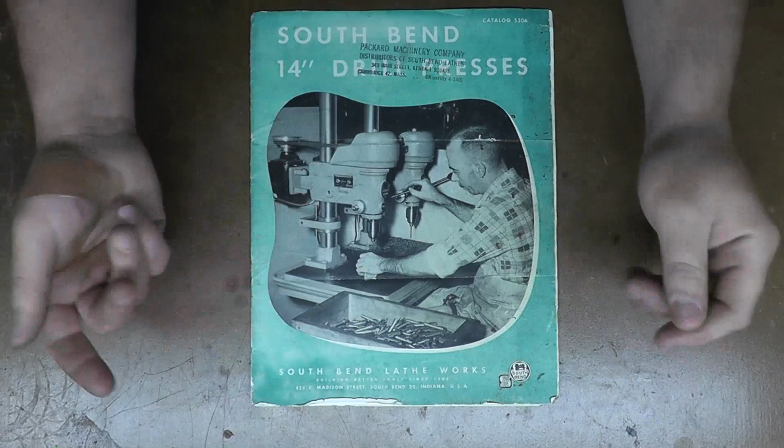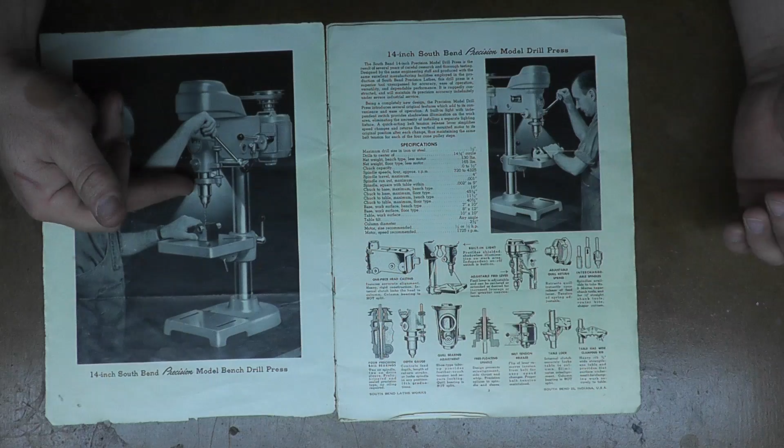Alright, so this is just an old catalog that was with my drill when I bought it. Apparently there were two types of drills besides the bench mount and floor mount: the precision drill press, which is what I have, and an economy drill press, which I've never seen before. It basically just didn't have all the bells and whistles. You can see this catalog's kind of falling apart.

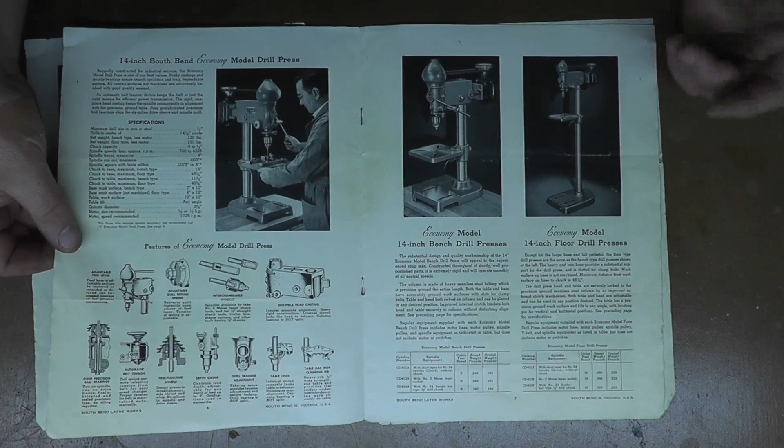This is the economy one. It didn't have a few of the options, didn't have the light, didn't have the quick release for the motor tension, and had a smaller casting up front. I've never seen one of these, only the ones like I have, but we're kind of concerning ourselves with a few of the options here.

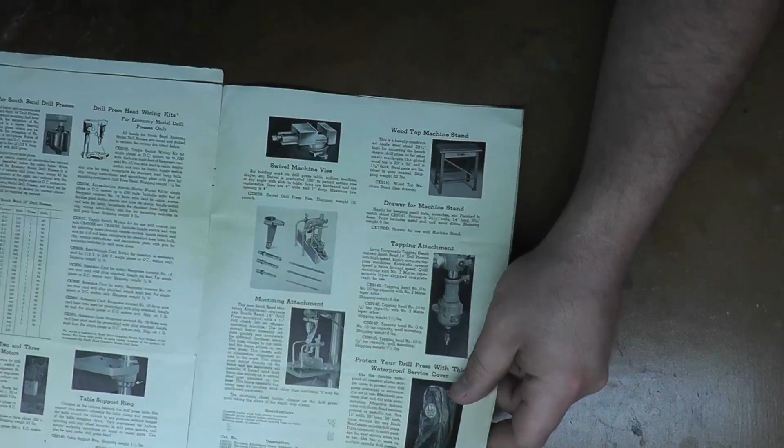And these are just mortising attachments, and this is the style of base that they gave that you could buy with it as a wooden table.

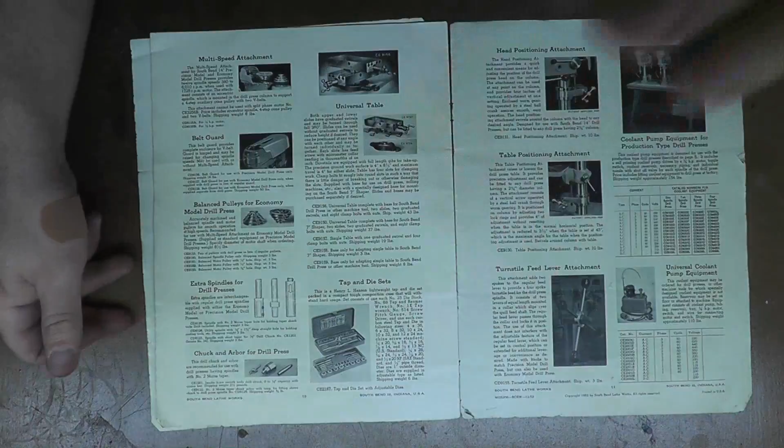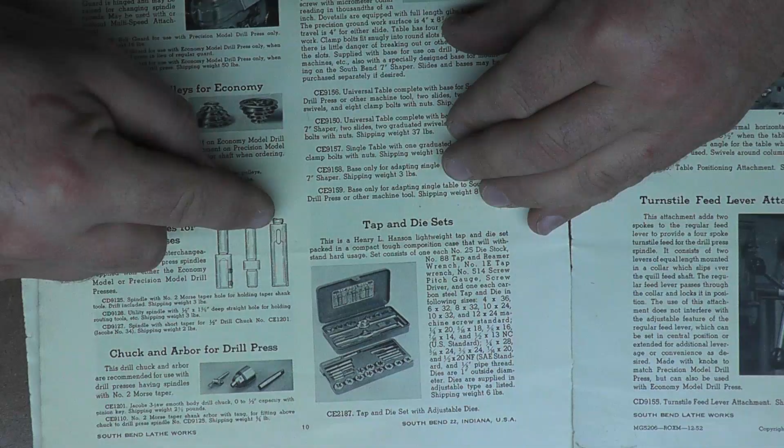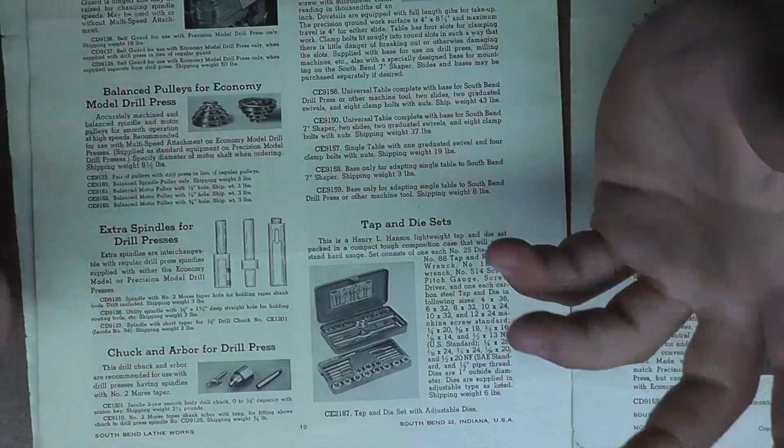Now the drill presses did come with different spindles in them, and they are interchangeable. There's a straight shank, which I've never seen before. There's the Jacobs tapered shank, which is what I have on the drill press. And there's the number 2 Morse taper, which I've also seen. The only problem with the number 2 Morse taper is that it extends below the casting, so especially if you have a bench mount, you lose a decent amount of travel with it.

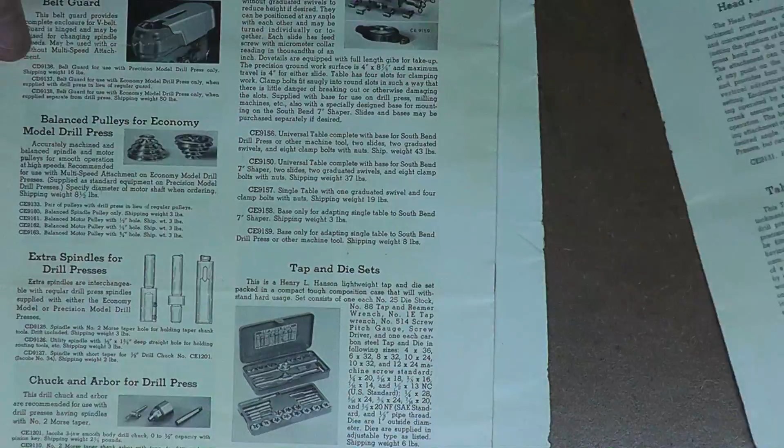And here's the multi-speed attachment up here that I have on mine. And what we're kind of concerned about here is this right here - and this is what we're going to be building.

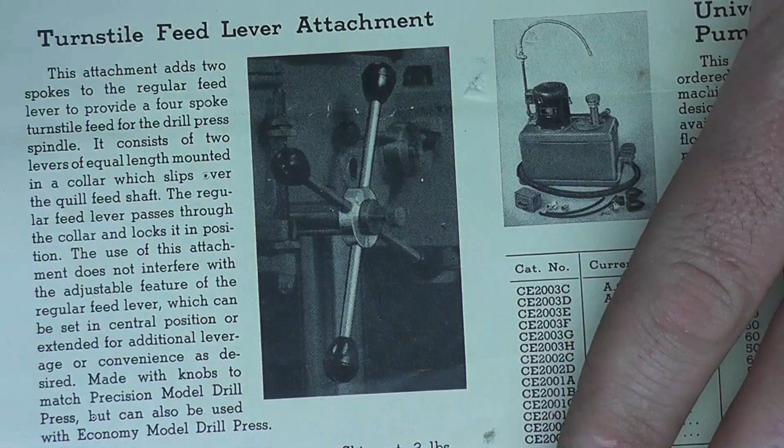So basically it still uses the original handle that's there and the original set screw for the handle, which mine is missing, so we do have to make that up. I'm pretty sure that's a 3/8 thread on there. We'll probably make that little knob out of brass, or you can make it out of steel - just be sure to put a brass shoe in the hole so you don't mark up this rod.

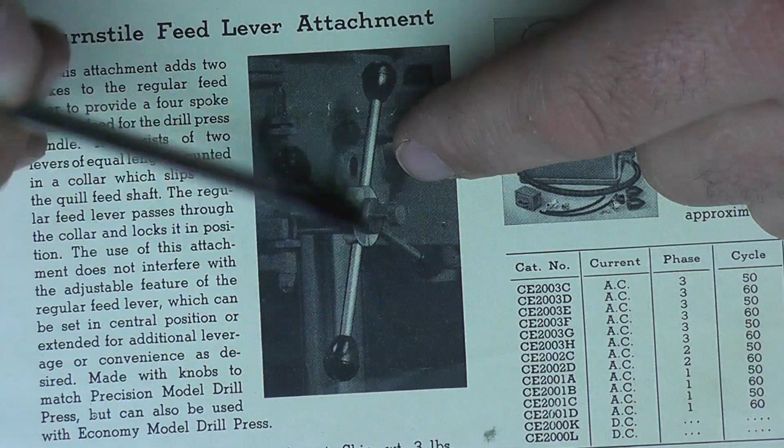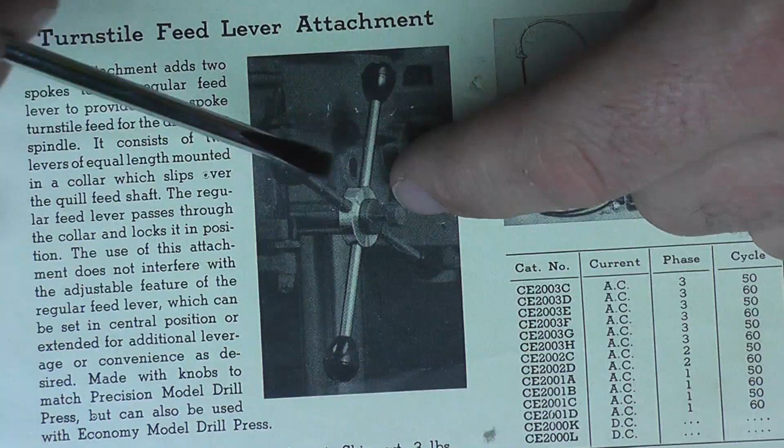So basically it consists of a central hub with two fixed handles on it. So we're going to make a rod. I'm going to drill and thread this here and here, and then have a through hole right down the middle where we can slide the original handle through.

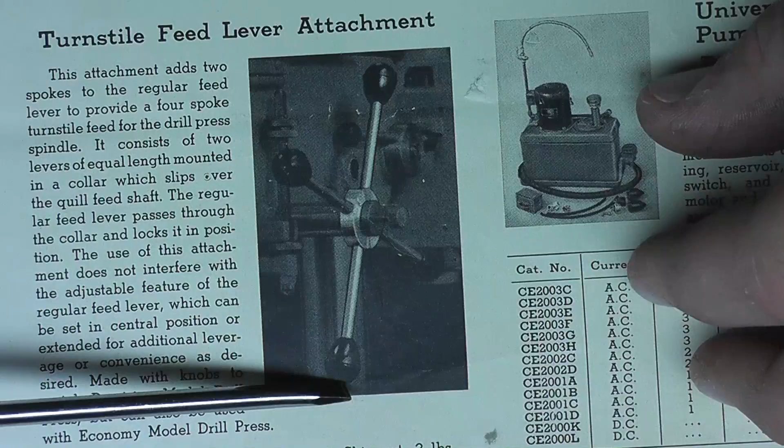Now I don't have any black Delrin or anything. These handle knobs are plastic, so I'll probably just end up making them out of aluminum or something. Plus they're kind of acorn shaped - I'll show you when we get to that part. The original handles are acorn shaped, so we might just make round ones here.

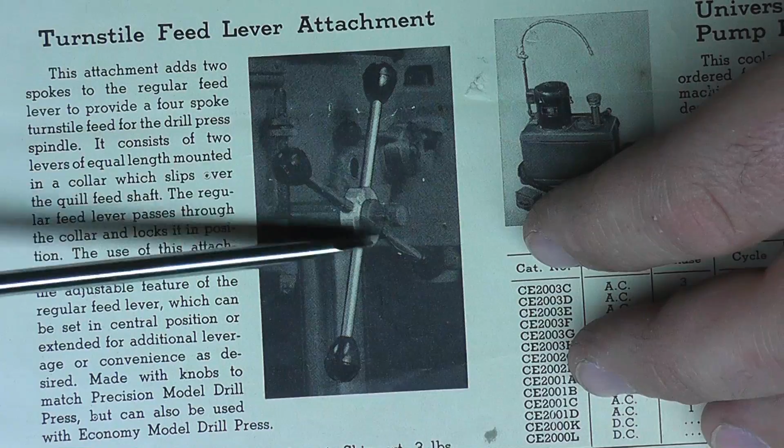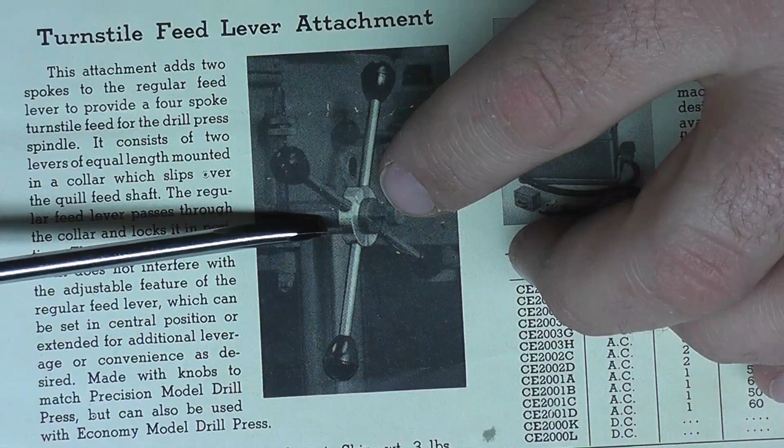We'll see. So we've got to make this central collar, which just slips over the actual quill here, and I'm going to make it 3/4 of an inch wide by the diameter of that quill extension, which is a little over 1.25 inches. So I'm going to have to bore that out. I'm going to use 2-inch 12L14 steel.

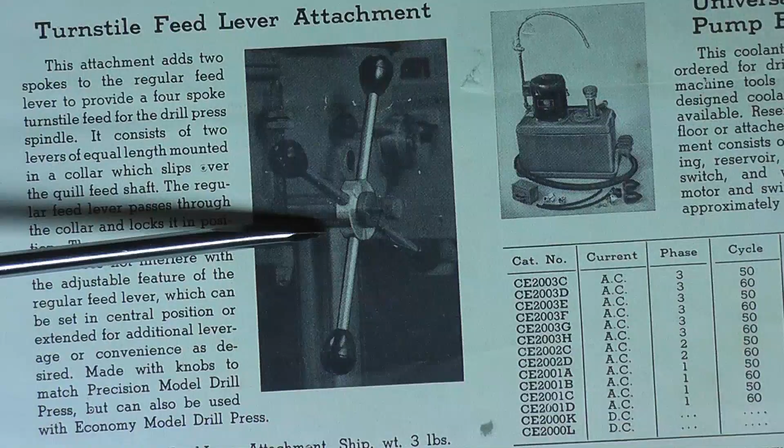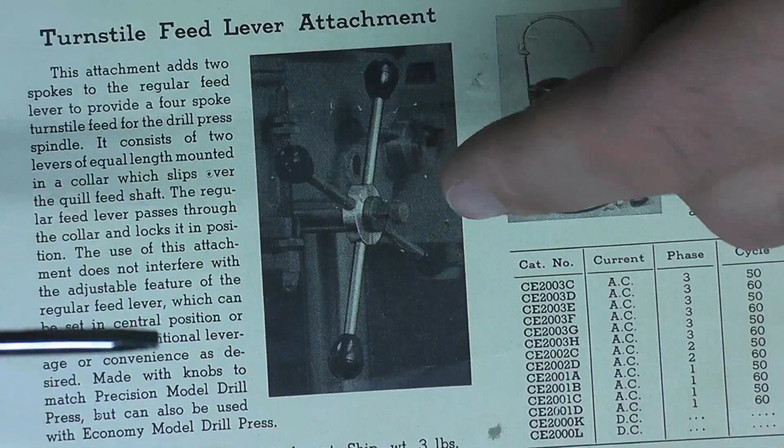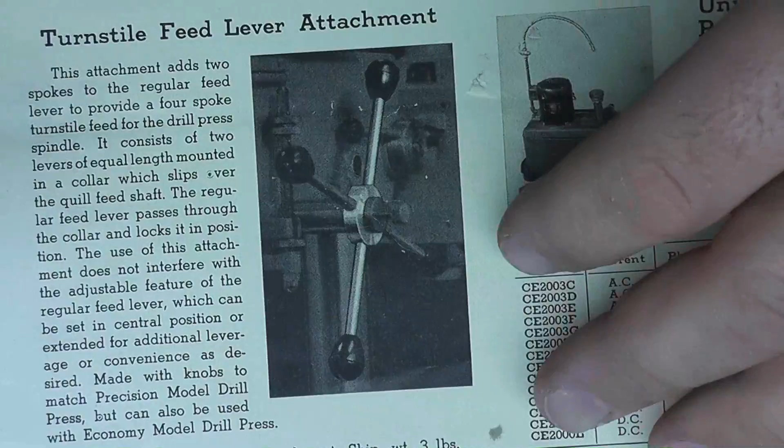And so we're going to do that - these rods here, the rod that's there is 7/16. Now I don't have any 7/16 stock around here. The closest size I have is 1/2 inch, so I'm not going to worry about knocking it down by a 32nd per side - it's going to be a little bit bigger. I'm just going to use the 1/2 inch on it and call it a day.

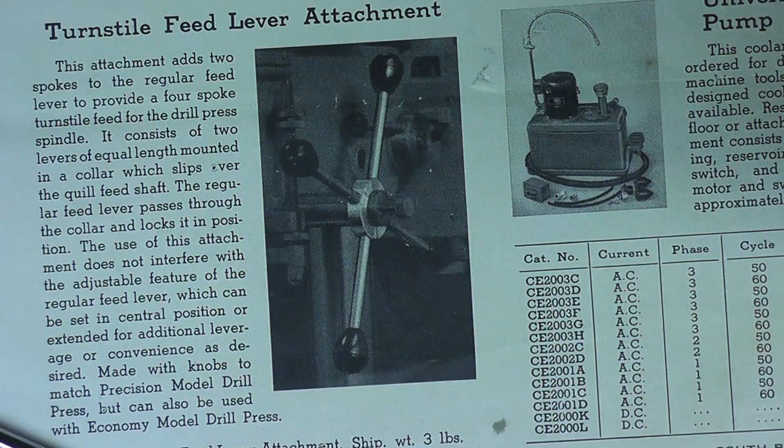If I had 7/16 steel, I definitely would use it, but I don't want to go out and order some, so we're just going to use the 1/2 inch I have, which I have plenty of. That's kind of the way we're going to make it.

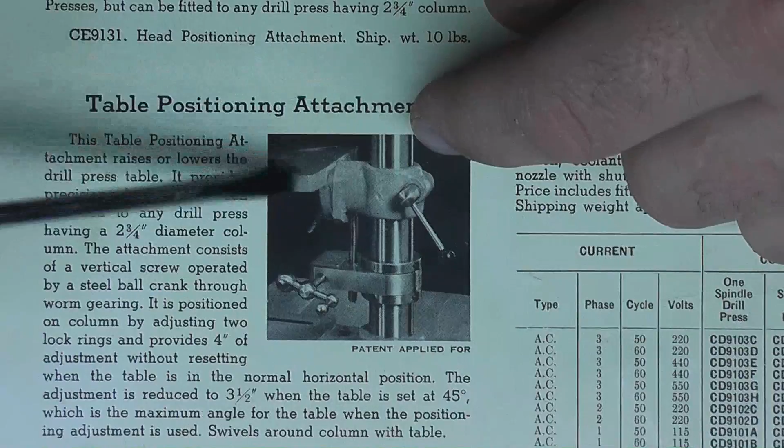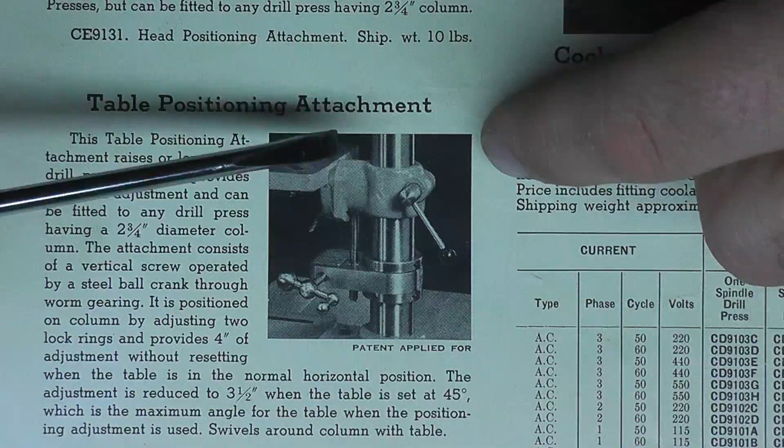Another cool attachment here is for a problem with these drill presses: unlike a lot of the newer ones, it doesn't have a hand wheel to raise and lower the table. A lot of drill presses have a hand wheel on the side with a rack and pinion to move the table up and down. The South Bends didn't have that. It's just a straight column, so you have to wiggle and shimmy it up and down.

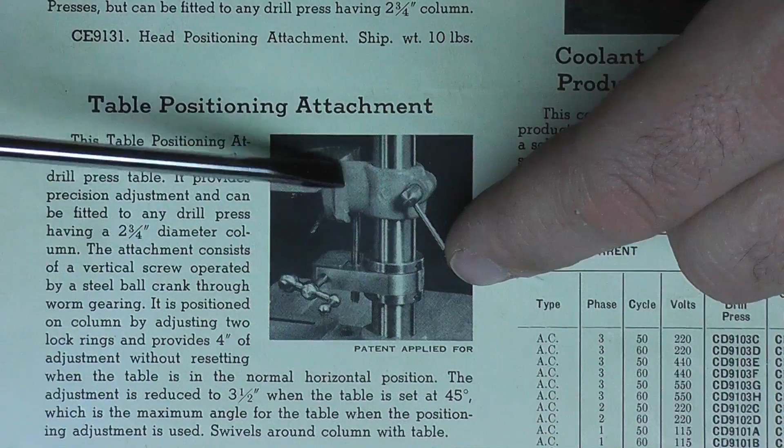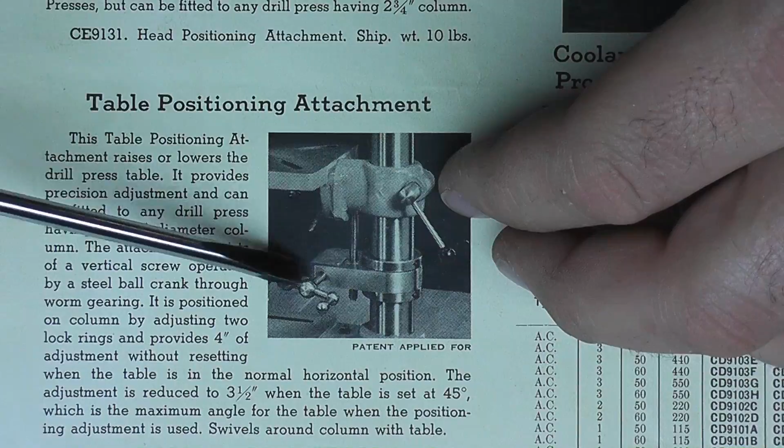But what they did make was this little attachment, which has a threaded rod that attaches to the bottom of the table, going to a clamp that clamps around the pole, attached to a hand wheel with a worm gear. This gives you 4 inches of travel, so you loosen up the table, crank the hand wheel, and you have 4 inches of movement up and down.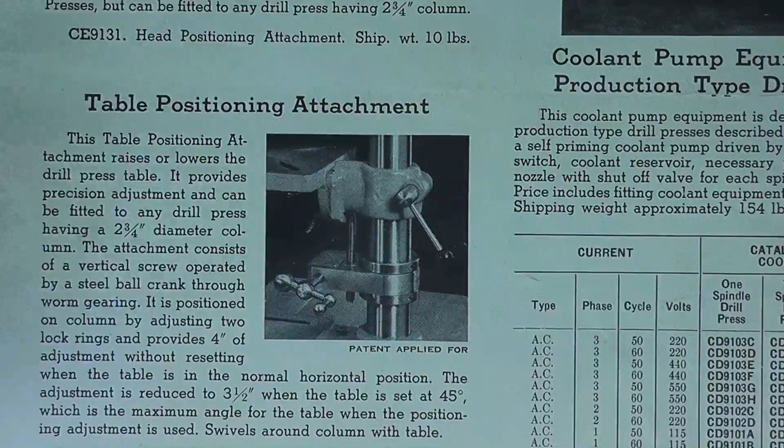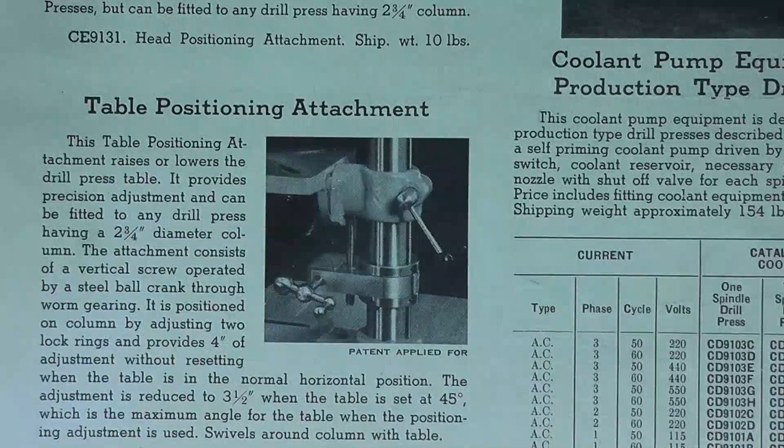And if you want to go more than that, you just loosen these 2 collars, slide it up a little bit, and you have another 4 inches of travel. That's a neat little attachment, and it's definitely something somebody can make in their home shop. Maybe eventually that will be a project. We shall see. So let's go set up on the lathe, and we'll get to making this collar here.

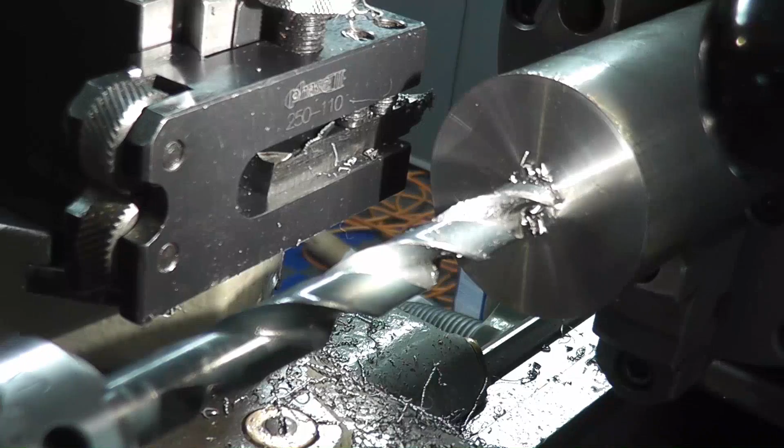Okay, so I already have my part faced and center drilled. Now we want this inside diameter to be at least 1 inch 285 thousandths. So I'm going to drill it as wide as I can, then bore out the rest. I'm going to go 1/2 inch and then...

11/16, and the largest drill bit I have or can find is a knockoff 15/16 Silver and Deming bit. We'll see how good these knockoff bits drill. This is a good drill bit, that'll drill fine, but the other two, not so sure about. I want the collar to be 3/4 of an inch long, so I'm going to drill in 1 inch. That way, when we part off, we know we have that bore all the way through. So let's get to that.

I just wanted to back up real quick because even though I do have a very nice Albrecht chuck, you kind of don't want to use these with reduced shank drills. You can and probably get away with it, but you do have a chance of over-tightening these chucks with the reduced shank. Albrecht actually says do not use reduced shank drill bits in their chucks.

So if I just have a regular Jacobs chuck—now this isn't one of the super chucks, this is just a regular, decent USA-made Jacobs chuck. The super chucks have ball bearings in them and clamp really tight. These ones, not as much.

But if you're drilling really big holes or something that's going to have a lot of torque on there, what you do is tighten all 3 spots on the chuck. There are 3 holes to put your key in. Tighten all of them. That makes sure you have a decent grip on the drill bit, and you'll have a lot less chance of it spinning in that chuck.

Like I said, this is a decent chuck, nothing against these, just the super chucks are much nicer and, as a consequence, much more expensive. Plus this is a knockoff Silver and Deming bit, so we'll see how this does. I mean, this is relatively soft steel, so it shouldn't be too bad, but we shall see.

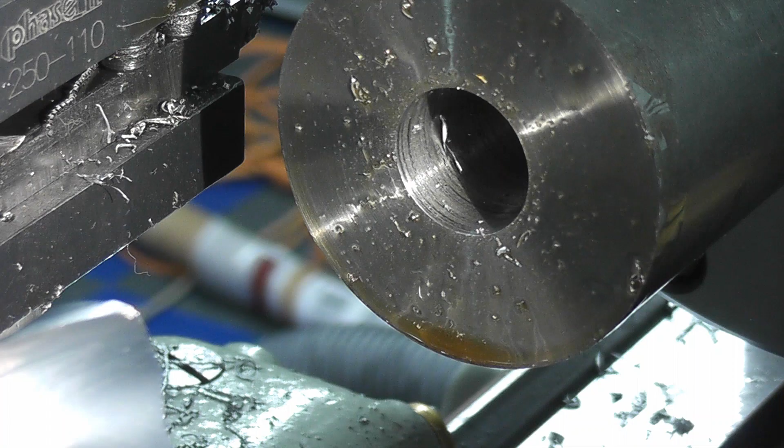We'll see how big it does over here. Distinct feeling that this one's not going to fare as well, but could be wrong. Again, I'm tightening all three spots on that chuck. And for depth, I am using the numbers stamped on the quill. Alright, let's see how this thing does.

Well, that wasn't too bad for knockoff $2 silver and Deming. Not even the silver and Deming bit - I won't even give it that much credit.

Alright, so now let me just set up to bore this. Okay, so we're set up to bore this now. I gotta bring it up to 1 inch, 285 thousandths. We're at roughly 930 thousandths right now.

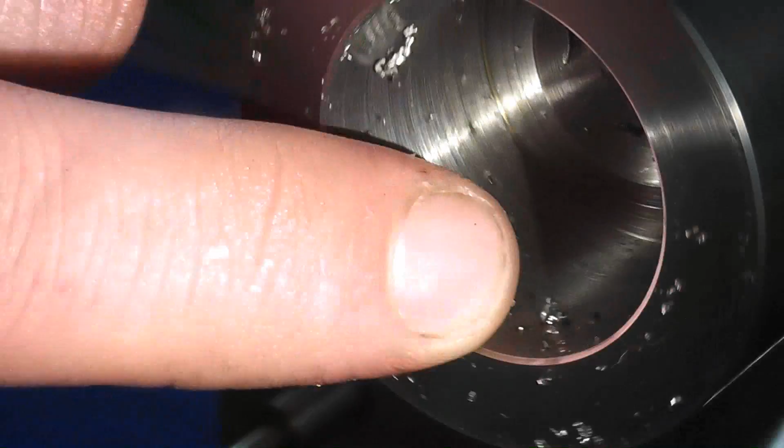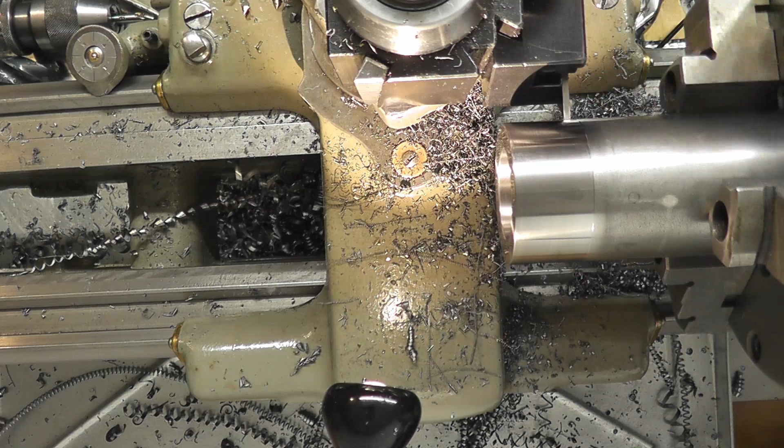Alrighty, so let's pull it back up and we'll get ready to part this thing off. I just did one slight truing cut on the outside so everything's concentric, and I just polished everything. Now since I'm going with 1/2 inch instead of 7/16 on the rods, I'm parting it off a little bit longer, so we have a 900 thousandths part here. Just a little laid down here, and we'll get to parting this bad boy off.

Now whenever you part off or face off on a smaller lathe, be sure to lock your carriage down.

This is leaded stock, so I can go a little bit faster than I would normally on the feed in. But with the leaded stock and stuff, you want to keep constant pressure on that tool.

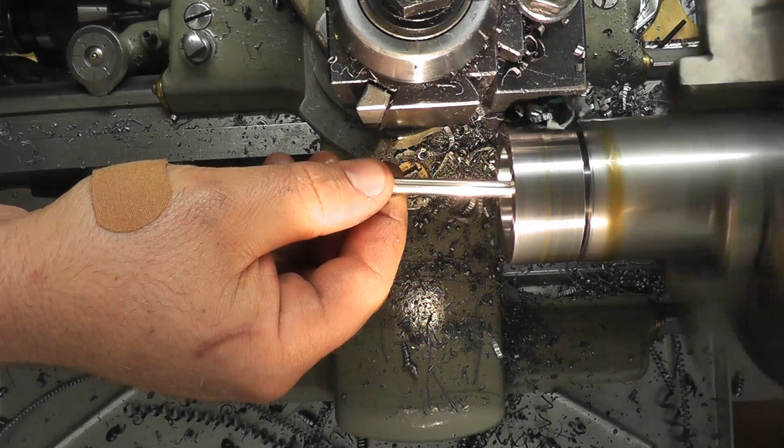This side here, I'll just re-chuck it and just give it a quick face.

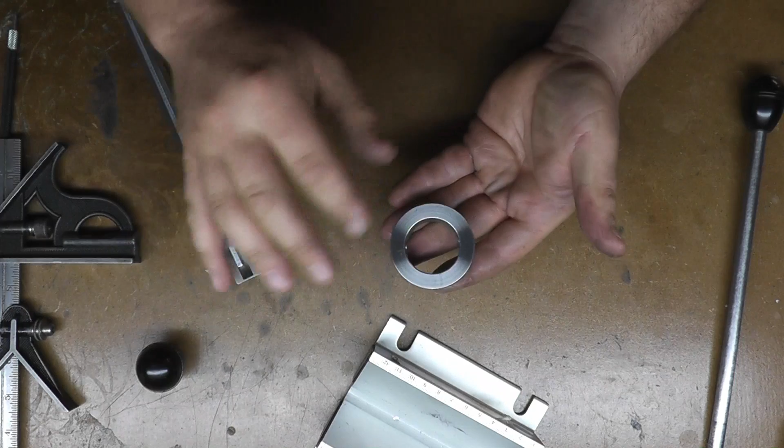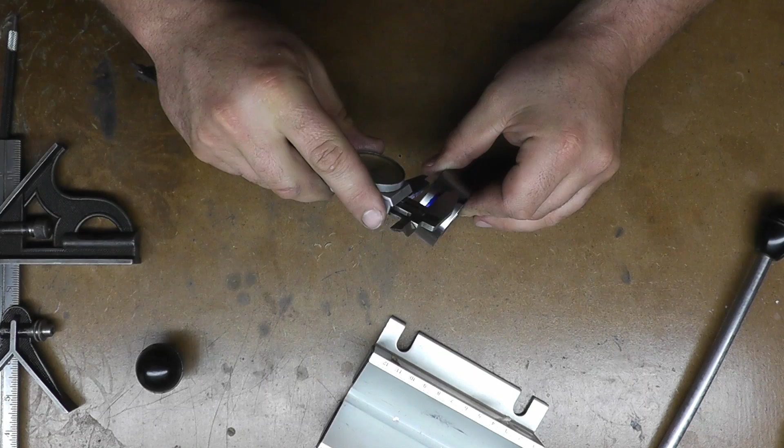Okay, so we have everything all parted off, we're all polished up. I already drilled the clearance hole for the original rod, which is already in there. Now the way I did that is I just put some bluing on there. I have my caliper set to half the distance there - just put one little scribe mark, switch it to the other side, do the same thing, that splits the difference.

And then I put a center punch mark in there, and I went over on the drill press and using my drill press vise, I lined it up and drilled straight through, making sure that we were in the middle, which we were. And because it fits really good, my drill press vise has a nice little slot in the bottom that you can kind of sit this in and wiggle it around until you get it perfectly vertical. And that's the way we went.

We got it pretty much dead nuts on center. I double checked it through the quill and we're fine on that. Now these two ends I have to drill and tap.

Now even though we're using 1/2 inch rod, I'm going to tap these 3/8-16. That's what the ends of this rod are, but there's a reason why I'm doing that. I could probably do 7/16, but I'm going to do 3/8 in case I ever want to get some 7/16 and remake the rods.

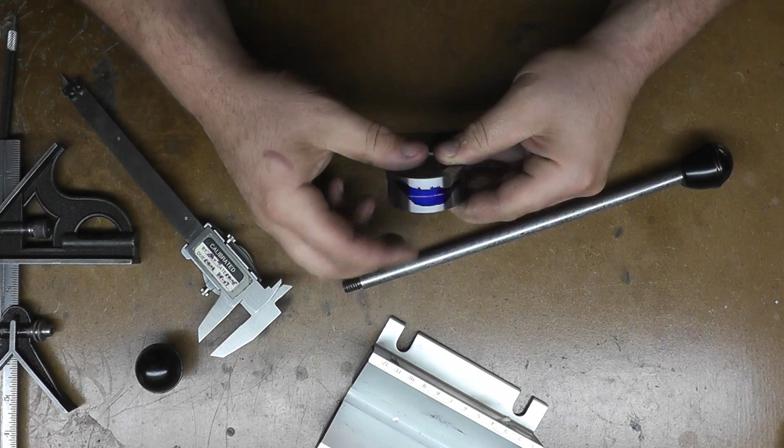But basically what I want to do is drill and tap that, and make the thread smaller than the bar, because I have to take an end mill and basically countersink it so that it fits - when you look at it on the side, it fits flat into this radius here. If not, it's going to stick above. So we have to basically mill a little flat on there.

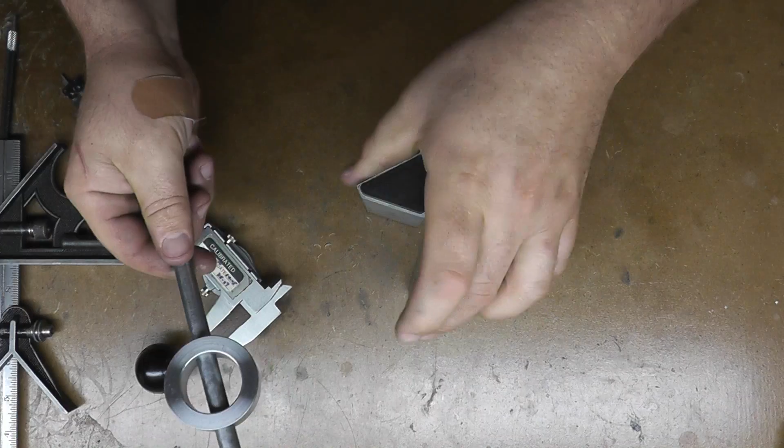So that's why I want to have a smaller thread than the actual rod that we're going to be using. And this actually works out perfect, because this bar through here and my little crappy V-block here end up being perfect. This is actually the perfect height for this V-block.

So I can put this in a vise and I can clamp this bar here, here and here. I can clamp this to the table and drill straight through, and we'll have a nice true straight hole. So I'm going to go set up and do that, and we're going to drill and tap these holes. I'll probably just show one because the other one's just going to be the opposite.

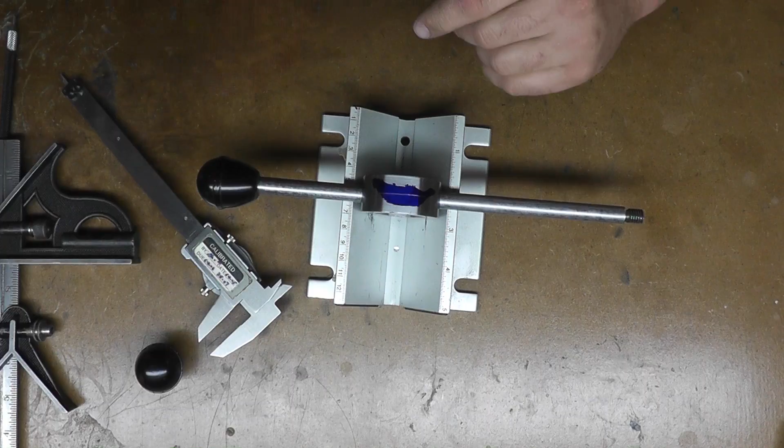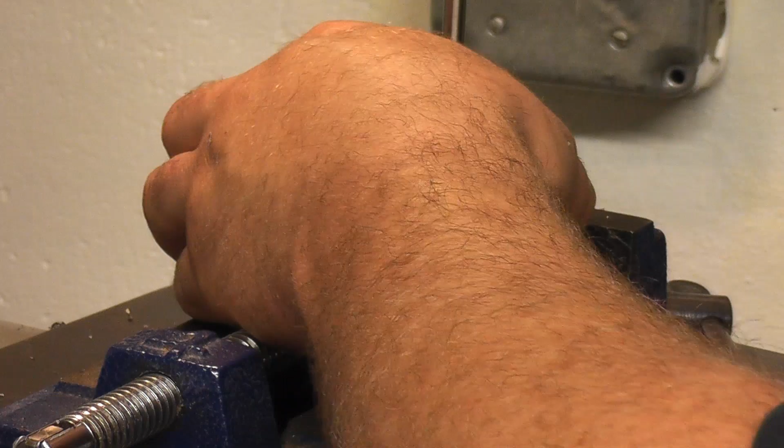Alright, I already center drilled this using the V-block, so what we're going to do is put it in my vise to be able to hold it. Kind of just line this up here, give it a quick little snug, and we're going to take our handle, put our handle through, and now we can pretty much get this handle level and know that we're on center. So a little bullet level. Okay, good right there.

Drilling. Oil, and I have a temporary handle in here. Through.

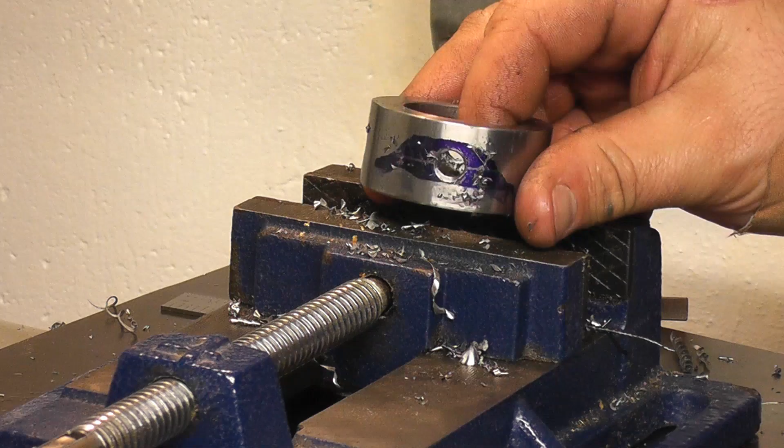And there we go. Drilled there, drilled there. Now if you put any marks, I did put a little mark right here from tightening the vise way too tight. If you want, you can face that off. I'm not really worried about that. I'll put that on the inside.

So now what I want to do is I want to make the pin to hold the quill in place, so that way there we can get how long that we need to make the two handles that screw into here.

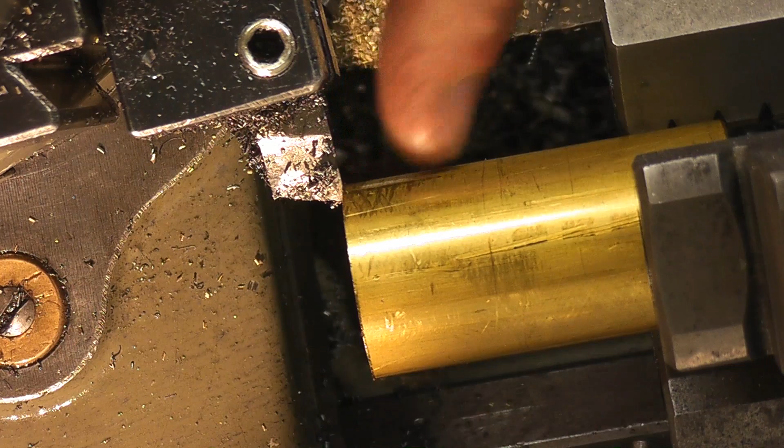Okay, so I need to, this is a piece of 1-inch brass, I need to turn down a length of 1/2 inch to 3/8 diameter so I can thread it. I have my carriage dial indicator set up here, so we'll turn this down.

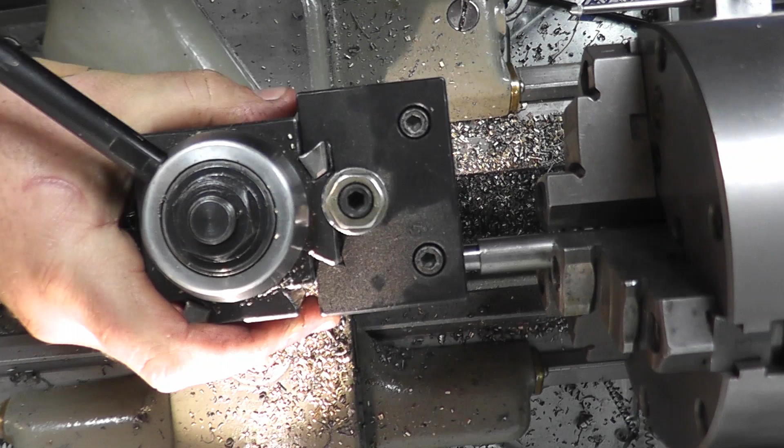This is just a boring bar holder, but it's really big, so I like using it with the dies. And the only reason why we're using the die, I'm not single pointing this, is because it's just such a short thread here. It's nothing too critical, so.

Okay. Lock this up. That pretty much ensures that we start everything all nice and straight. Go down as far as that can go.

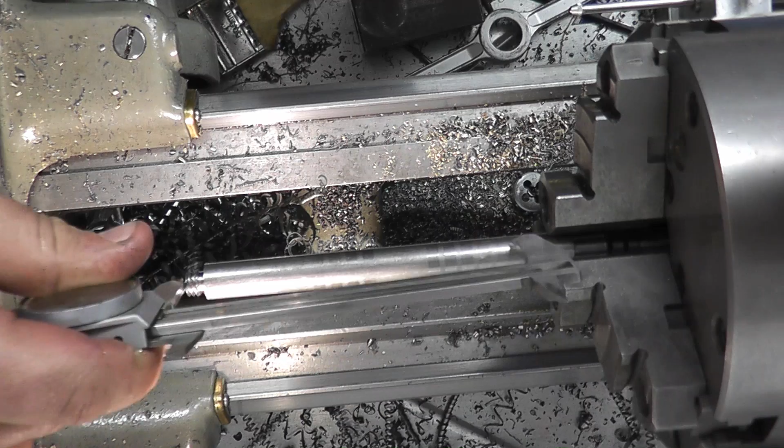Now a little relief so that it can go in. We want 4.5 inches. Just enough on this thing to part it off. Go in just a hair. Right about there. Okay.

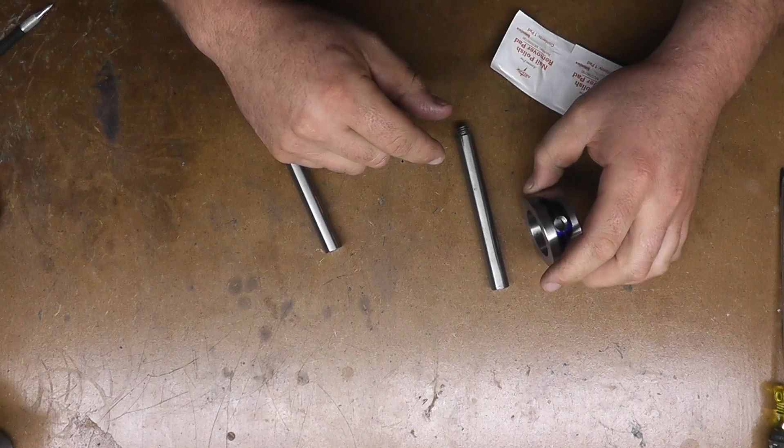Okay, so we have everything done except for the knobs. Now, I did do another quick little facing cut and just get that little squish mark from the vise off of there. I should have put some aluminum in there as a spacer, but you know what, I didn't. Lesson learned. And if you use a lot of Dykem, don't buy the Dykem remover. It's a waste of money. Just steal your wife's nail polish remover, and that'll get it off.

And I found a cut. Son of a... that burns. And there it is.

Okay, now that I stopped the burning in my hand, this is the through hole, and these are the threaded holes. Now, this is the 1/2 inch rods with the 3/8 thread on the end. The reason why I chose 3/8 is because the original rods are 7/16, so if I ever come across some 7/16 stock and wanted to remake these, I still have enough to cut down the 7/16 stock to a 3/8 thread. So these thread in here.

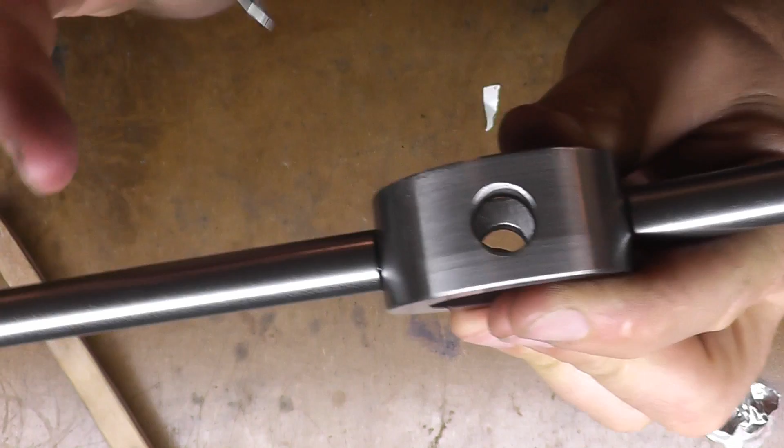Now, the next video, which I'll probably get to next weekend, is going to encompass two things. We'll make the knobs, and what we also need to do is, as you can see here, this gap, I need to countersink this rod into here, which is part of the reason why I made those threads only a quarter inch long - so I still have enough room to make a nice flat spot so these fit in nice.

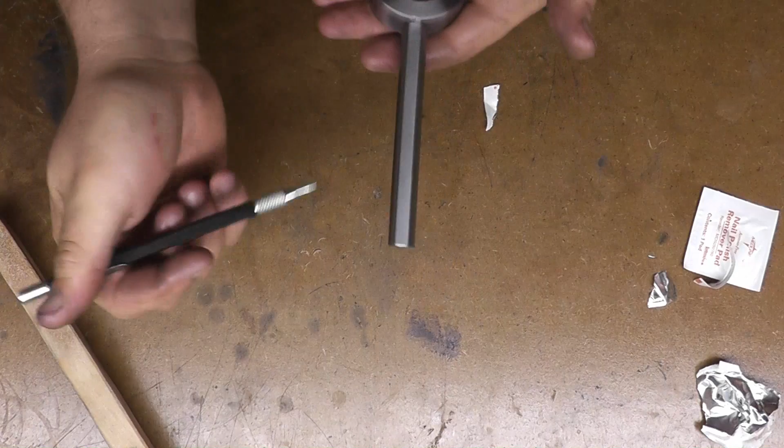Now, does it need to do that? No, it's more of an aesthetic thing, but I'll probably set this up in the 4-jaw. In this orientation, we can indicate off of this, and use the tailstock in the lathe to countersink that real quick. The reason I'd rather do it that way rather than in the drill press is because that vise has to be super rigid to get that end mill to keep from wandering off or pushing the vise away, and that's really not a rigid drill press vise.

So I could probably just set this up in the 4-jaw, have one jaw here, clamp across, and be able to indicate this rod to that hole. More than likely, that's the way we'll end up doing it. So let's go see how it actually fits on the drill press.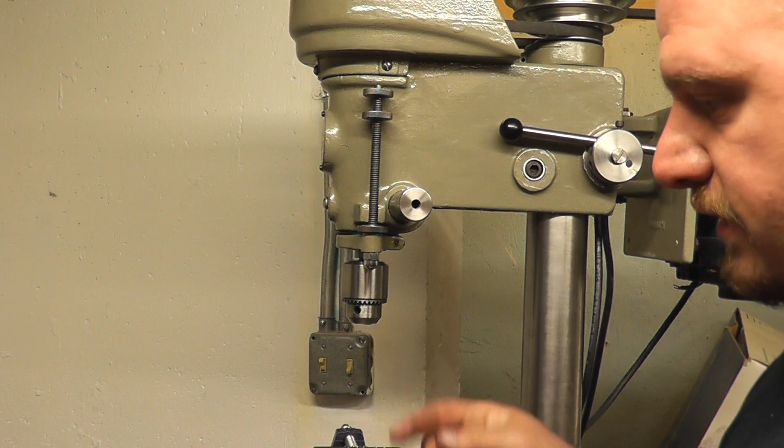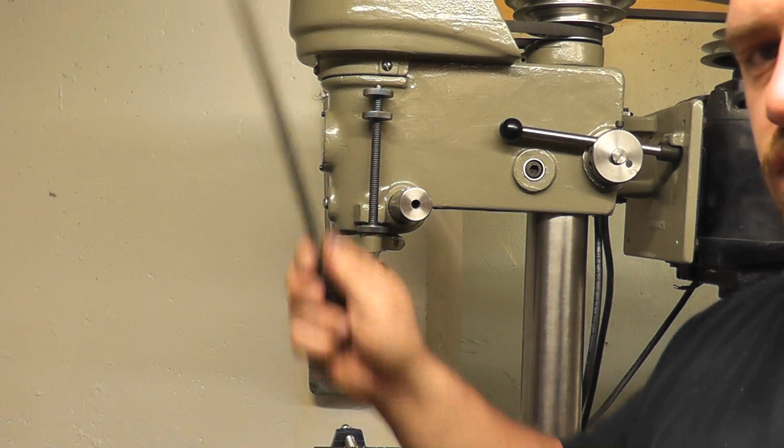Okay, so here's the quill. Now there's a spring on the inside here that pushes on a tiny little ball bearing that puts tension on the quill handle, so it's not just flopping around when you loosen up this screw. I just took that out because it already popped out when rolling across the floor and I almost lost it.

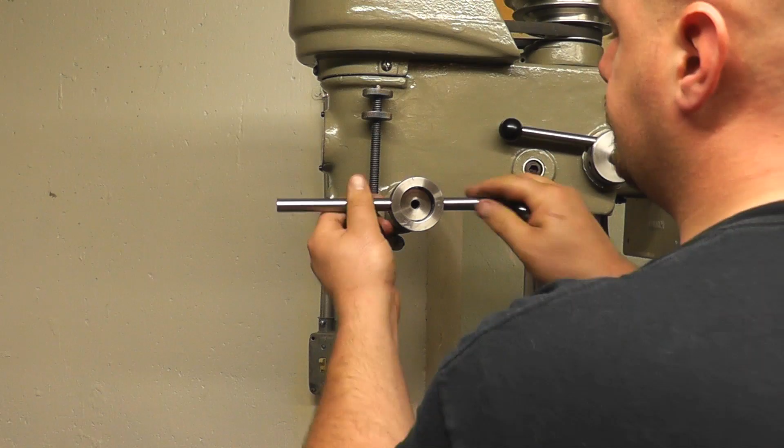So what we need to do first is put the handle we made on, and we got a nice sliding fit in here, but we have no wiggle in it. It's a nice tight fit, but enough to slide on. And put the original handle through. Now that's the only thing that holds this on, is the original handle, and that's the way the actual South Bend version of this was.

So it may or may not want to add a set screw in this. I'm not quite sure, but you can still see we still have movement of the center quill handle, and here's the screw we made to lock it down. Made it out of brass so we're not dinging up that shaft, and there it is. Well, it's not quite centered, that's almost centered there.

And that's pretty much it. You can see, even though it's set at a little bit of an angle, this is at an angle too. We're 90 degrees to each corner here. And there's your hand wheels. It didn't come out too bad. Still got a little bit of work to do on it, but that'll be on the next video.

So we're pretty much done with this video here. Next week, what I want to do is make these hand wheels, or knobs rather, and sink these rods in. Now, I don't want to make them out of aluminum. You see there's some sort of black plastic bakelite or something with a brass threaded insert in there.